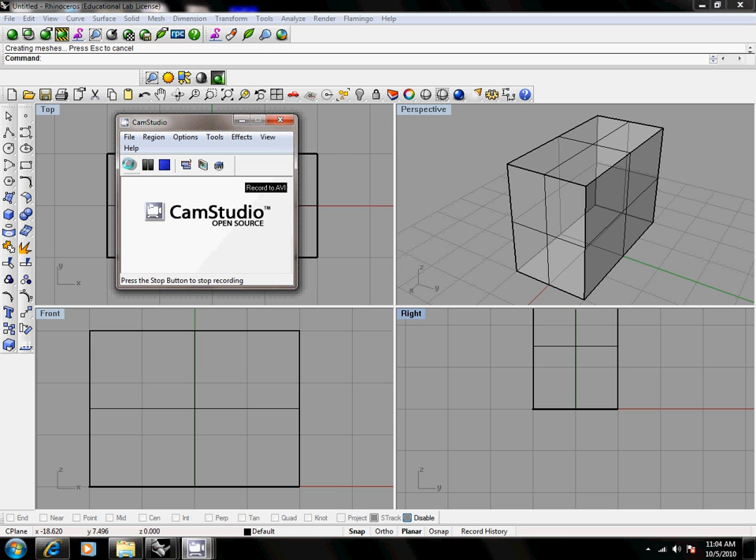Okay, so this is another tutorial for a new tool that you guys are going to use called trim, and this is for making holes into surfaces.

So what we're going to do is open Rhinoceros, and we're going to choose small objects, centimeters.

In this case, we're going to make a box, and then we're going to start creating holes around it so we can simulate a computer. So we're going to maximize the top view, and I'm going to start creating a rectangle.

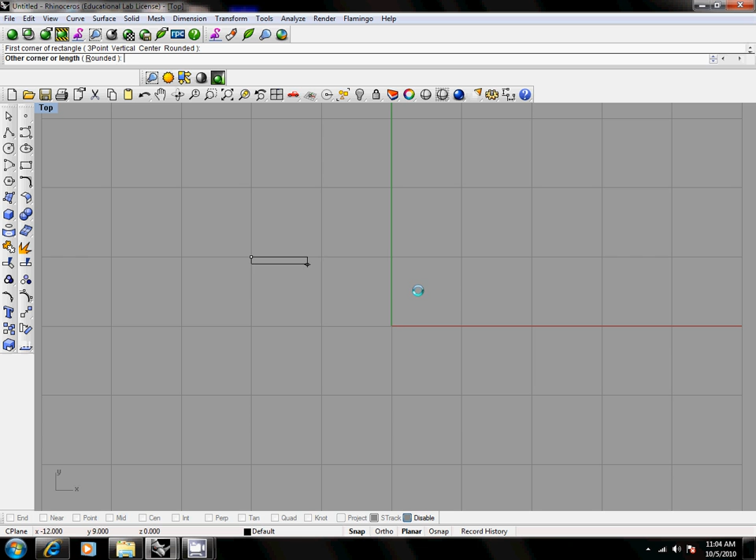Remember that I should have snap and planar activated in order to do this. So I'm going to start at -20, 10, and make it 40 centimeters long and 20 centimeters wide. So here I created my rectangle.

Now I'm going to extrude this curve, extrude planar curve straight, and make a box. Remember to read the command line - it says select curves to extrude.

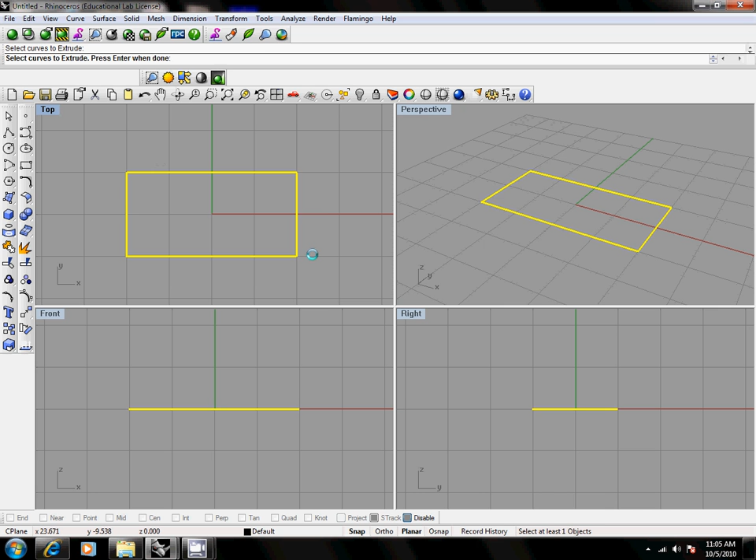I'm going to select the curves, press enter, and then extrude them 30 centimeters. On the front view I can count the 30 centimeters, and here I have my box.

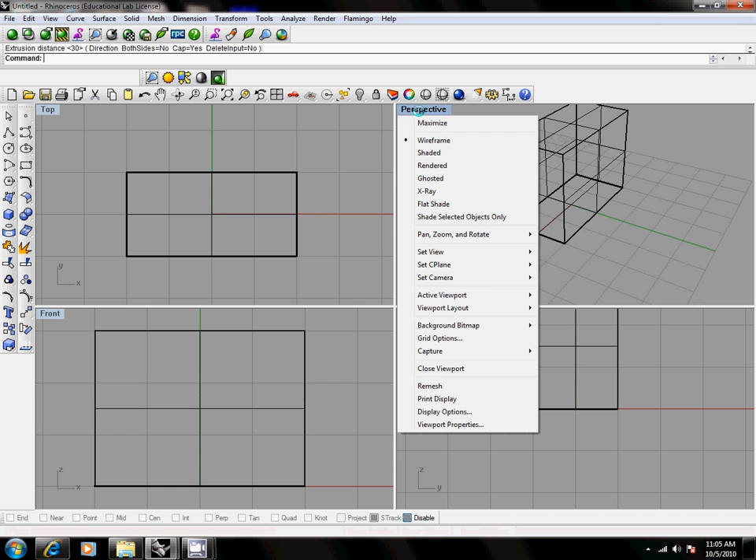Remember that if I right click on perspective, I can choose ghosted, so I can see a better view of the surfaces. So I have my PC or computer case, and I'm going to start making holes that simulate the ones on my computer.

On the front view, what I'm seeing is actually the side view of the case. So I'm going to draw all my buttons and the holes on the right view. I'm going to maximize the right view and start drawing different holes.

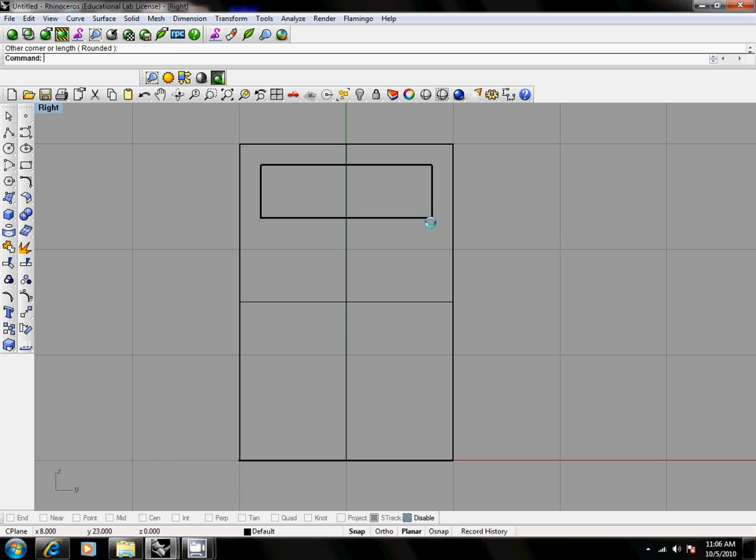So I can make a rectangle over here, and then I'm going to make my jacks with a circle.

These are pretty big, but you guys can make them smaller - it's for you to know. So I have the jacks over here.

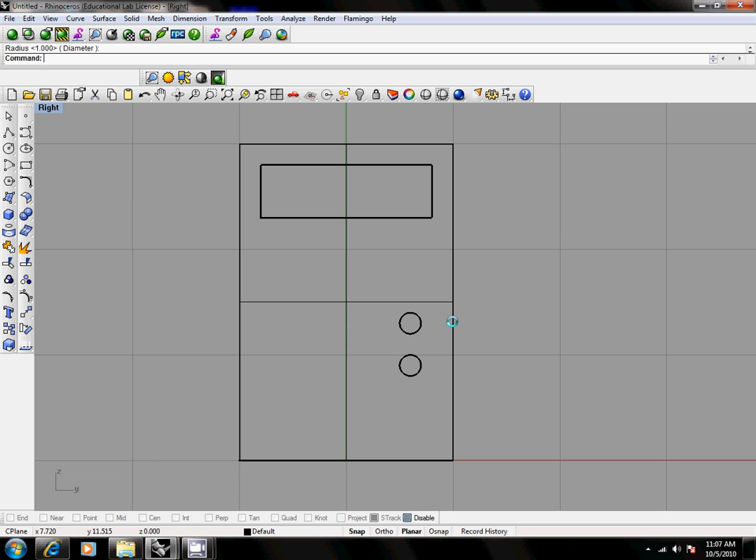Then I can make an ellipse for the power button here. So what I'm going to do is make holes out of these 4 curves.

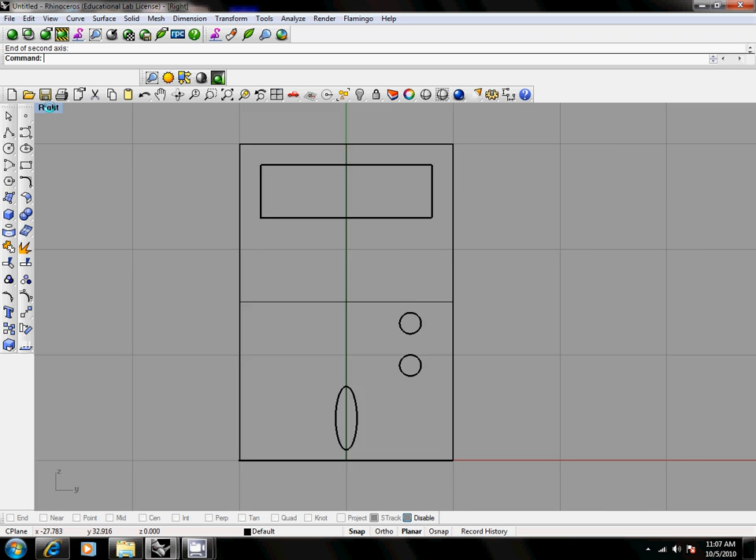The first thing I have to do is take them out of the case, because they're probably drawn inside. As you see, we have them here inside the box, so I'm going to have to take them out.

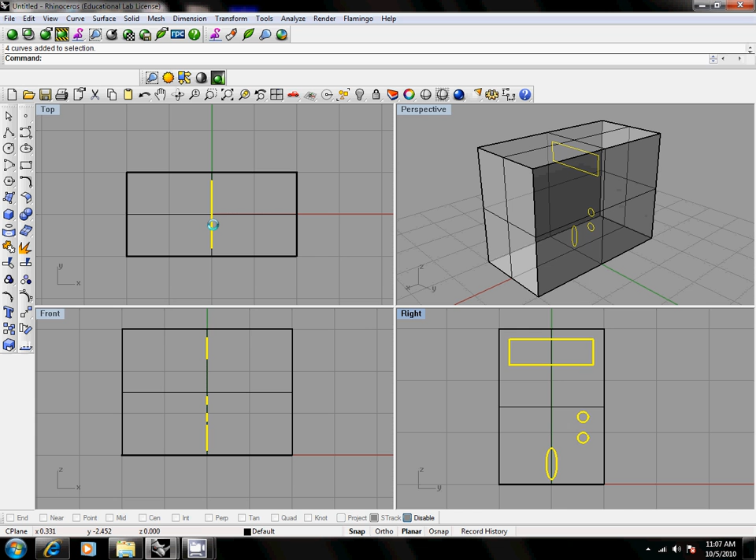So I'm going to select these 4, and then you can either do it from the top or the front view. I will take them out of the box.

Very good. Now as you see, I have them over here.

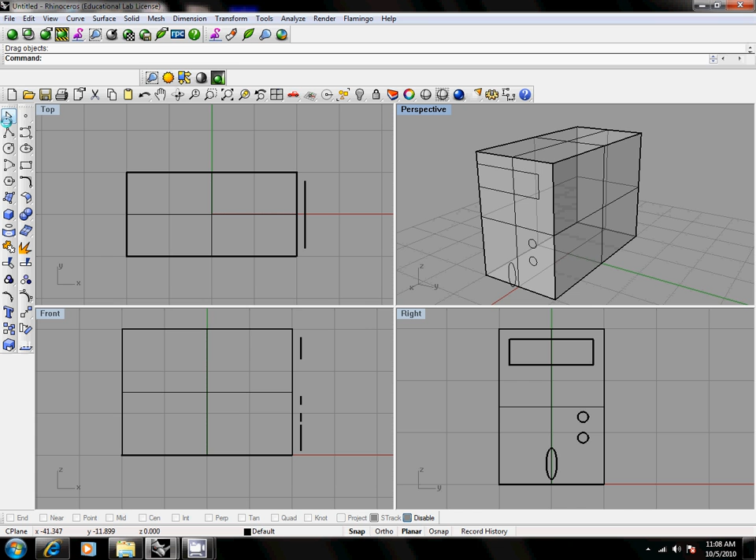So what I'm going to do is use the tool called trim. It's located on the left panel. You can either click on it or type trim.

The command line says okay, select the cutting objects that you would like to trim. So my cutting object, first thing would be this one, that is the CD case. Now after you finish selecting the cutting object, press enter.

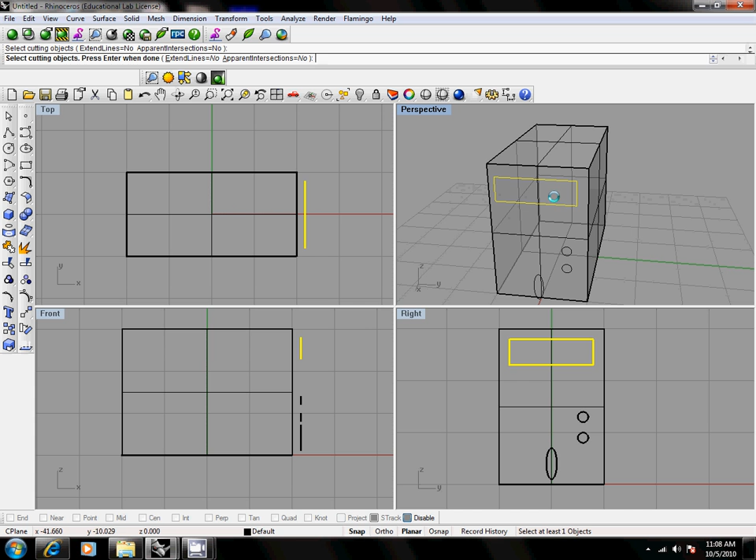Now here's the tricky part. You have to maximize the perspective, and you have to locate it as if you were perpendicular to the surface that you are going to cut.

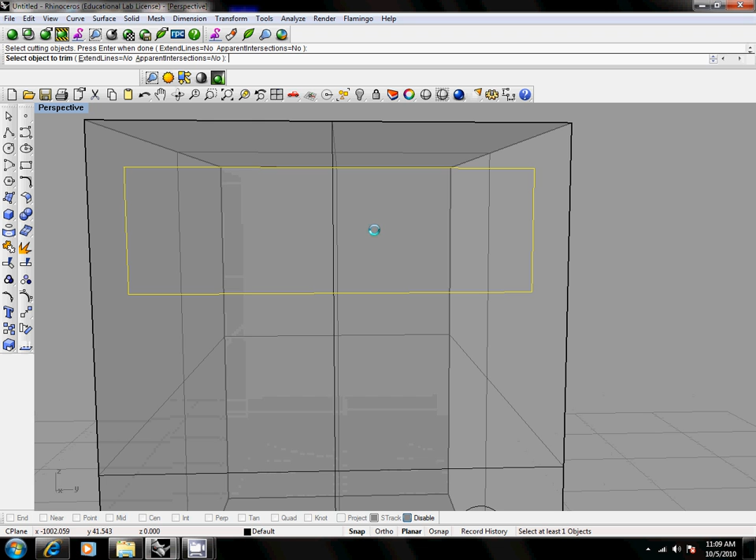So basically what I'm doing is zooming in so I can assure that I am looking perpendicular. So I'm going to click inside, okay, and look, what I did was create a hole inside the box.

Now I have a hole inside the box. Now after you finish trimming, you can press escape so you can do it with another one.

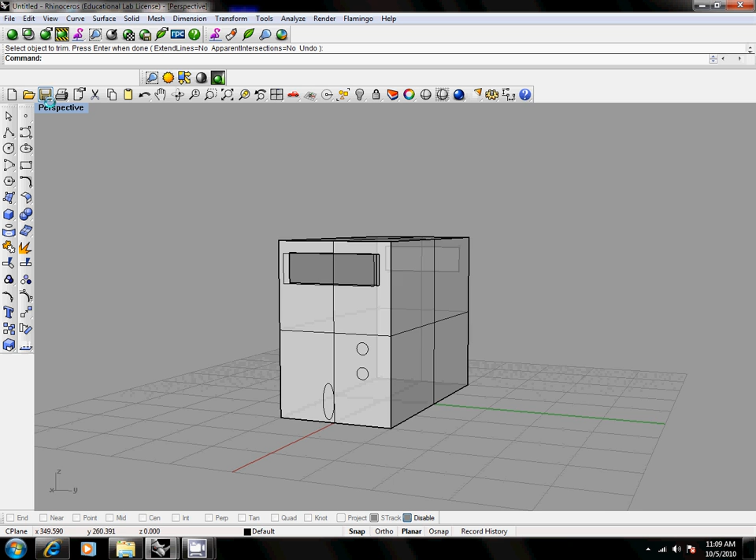You're going to do the same with all your other holes, and then you can start trimming.

If when you trim it doesn't open a hole, it just disappears the whole box, then you can press Ctrl Z to go back and try it again.

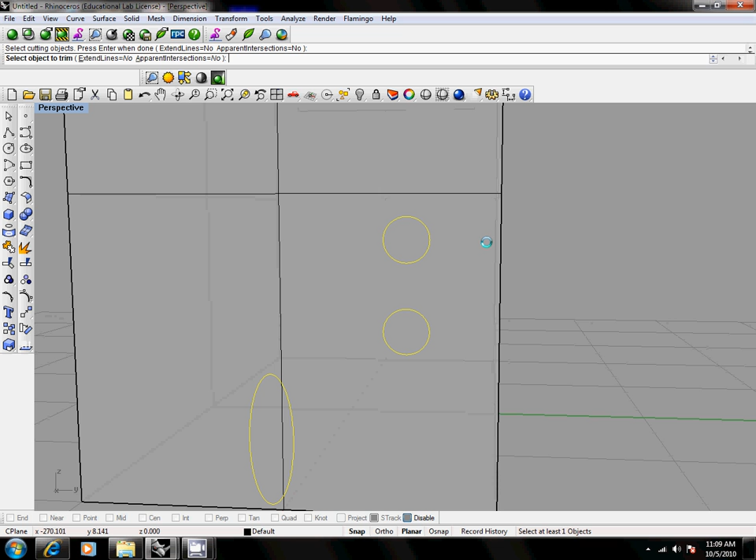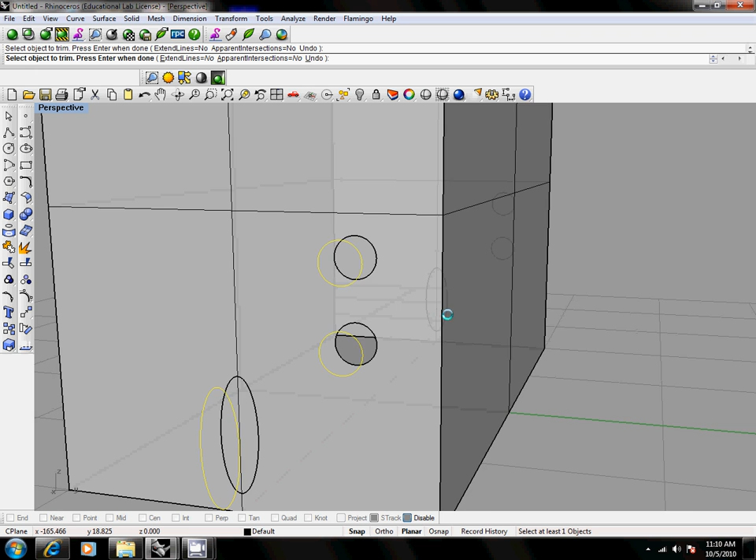Okay, so here I was able to open this hole. Now I'll do this one. And I'm missing - remember to always put it perpendicular.

Put it perpendicular and cut. Very good. So now I have my holes.

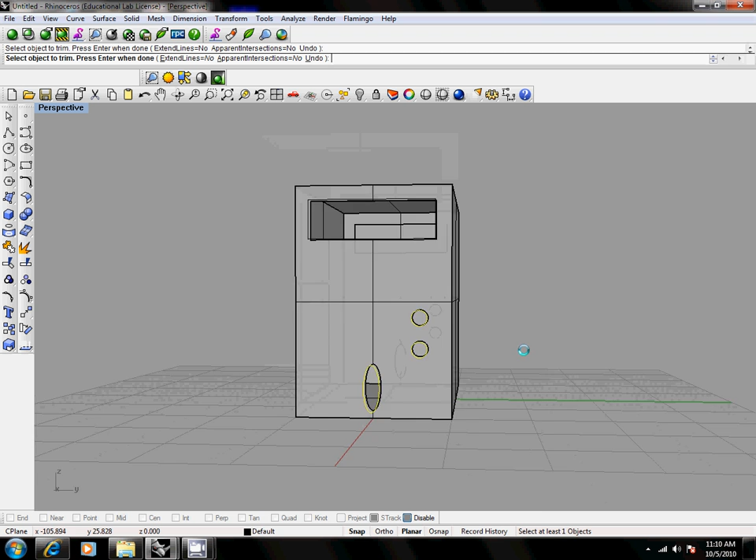I have the 4 holes that I created. And then from there, you guys can start making some other stuff that you already know, like trim, like filleting the edges over here, and you can make a box that you can put inside.

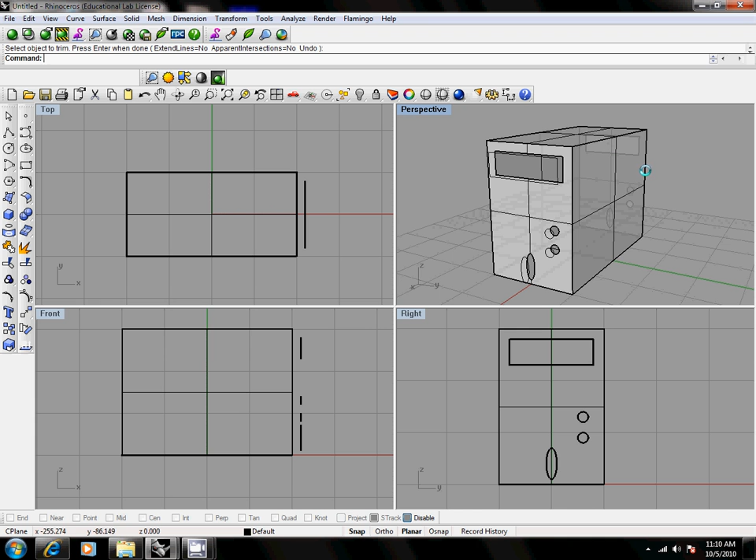Oh, and here, if you have the button, here you have the 2 buttons, or the 2 jacks, and here you have the power button.

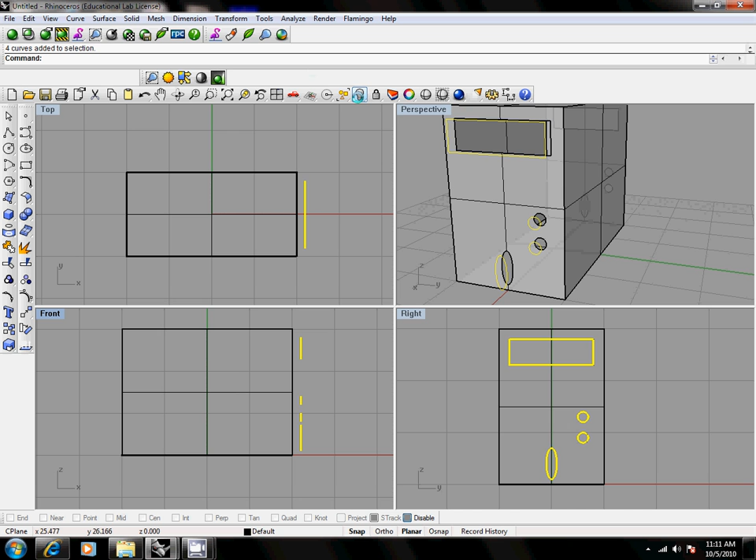What you do is select these curves, select the curves that I used, and I can use this light bulb over here to hide them. Now I can have my box here.

Now if you guys want to add a couple more things, you can fillet the edges and start rendering. So that was my presentation for trimming through surfaces. Now you guys can create yours.

Video tutorial for you guys. In this case, I'm going to start talking about a tool called Trim that can create holes in different surfaces.

So let's open a new rhinoceros file. And we are going to choose small objects, centimeters.

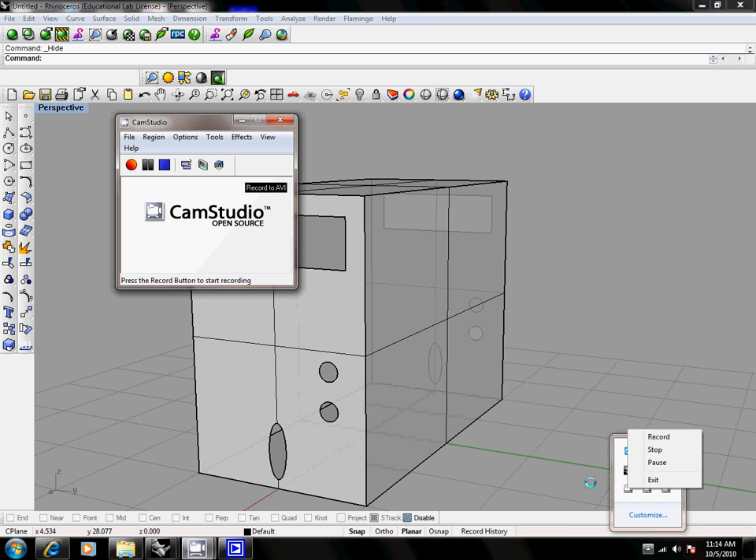Now this curve, I will extrude and make a box out of it. Remember that I should go to Solid, Extrude Planar Curve Straight, and the command line says Select Curves to Extrude. Now here, I will choose this curve and extrude it on the front view.

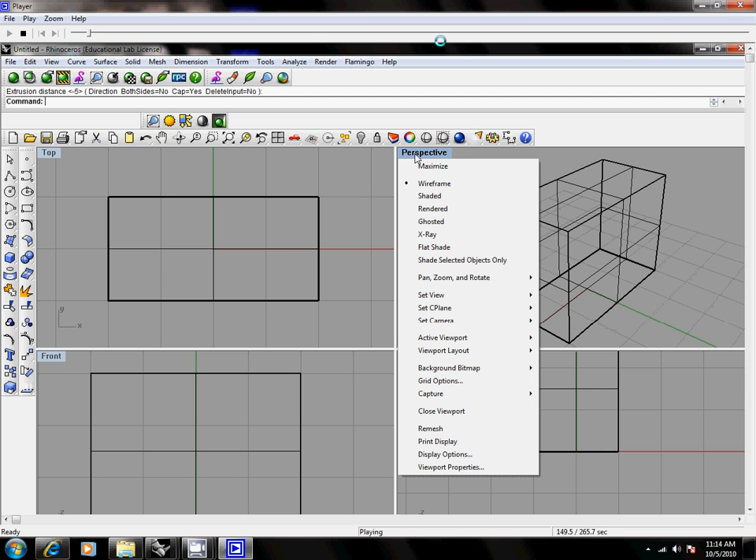I will extrude it 30 centimeters. Now I have a box, and I can see it on the perspective view. Remember that if I right-click on perspective, I can choose Ghosted, so I can see the surfaces.